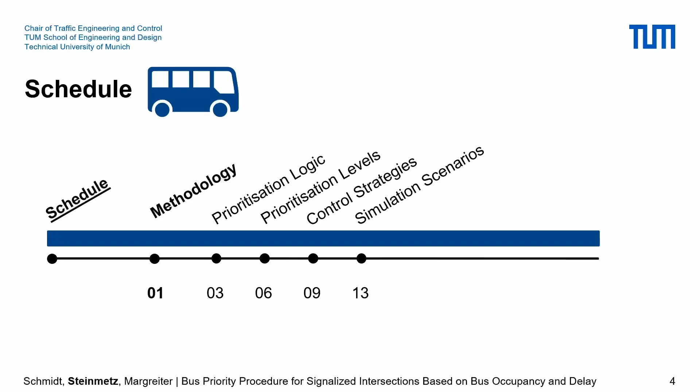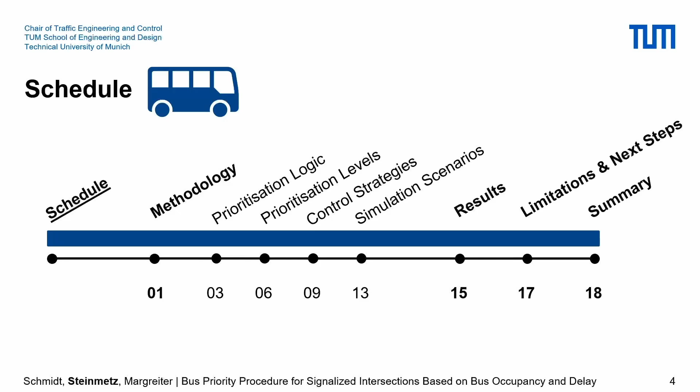So what is the timetable for today? In the next slide I will start with the methodology, including the prioritization logic, levels, the control strategies, the simulation scenarios, and then finally I will show you the results of some test simulations, mentioning the limitations, next steps, and the summary. So what is the methodology in this work?

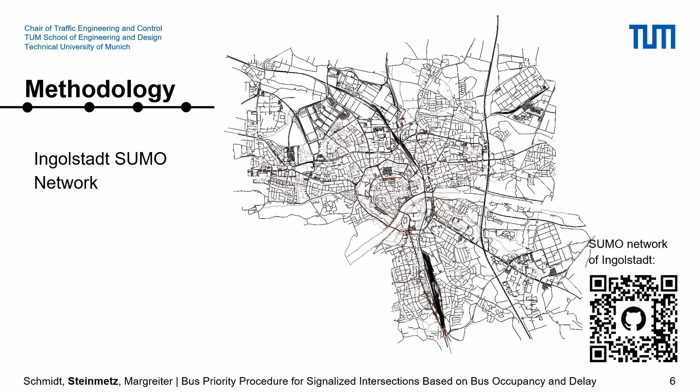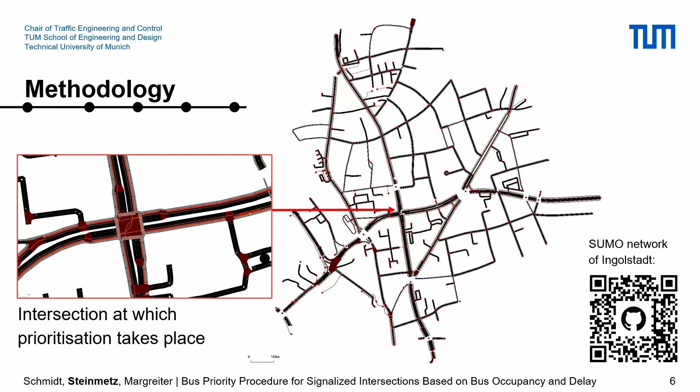We have simulated a subnetwork of the SUMO network of Ingolstadt. This network is publicly available; you can scan the QR code on the right to access this repository. We had the so-called KIWI project running in Ingolstadt for artificial intelligence in the traffic system, and this motivated our work. So we simulated this subnetwork of Ingolstadt and applied the bus prioritization at this single intersection, but we also wanted to show the impacts of surrounding traffic in our test scenarios.

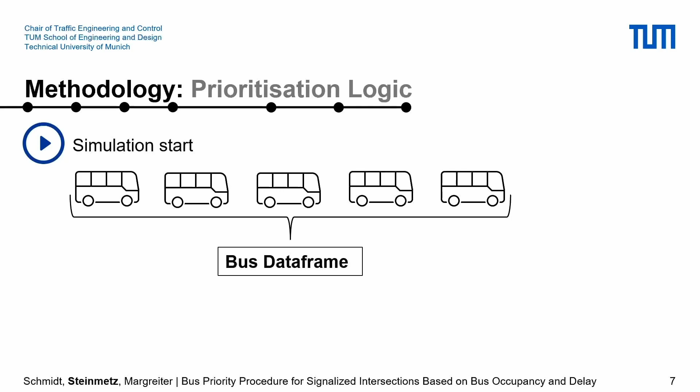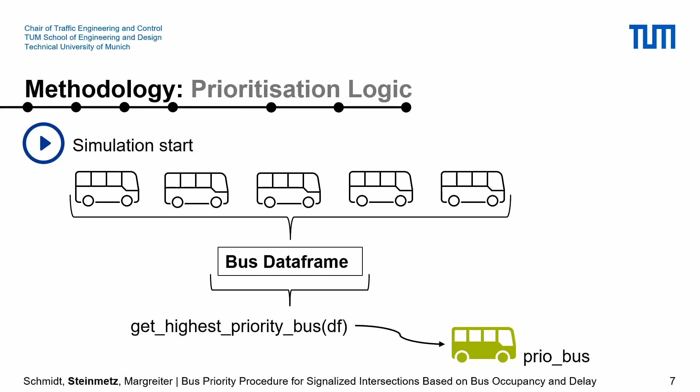So how does it work in detail? During simulation, we always know which buses are in the system, and if we imagine that in reality, with vehicle-to-X communication and roadside units, we will always know everything about our buses. They should transmit their position, their line, their occupancy, and also their delay. For every simulation second, we check again which bus has to be prioritized, and as I mentioned, this can also change.

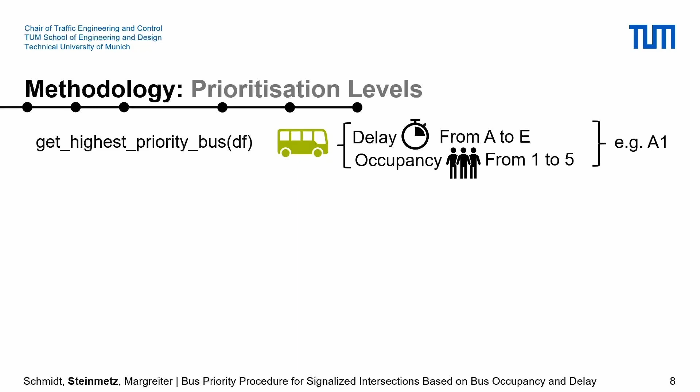So how to decide which bus should get the prioritization? First, we have delay and occupancy considered. The delay is categorized from A to E, with A being the highest prioritization, and the occupancy is leveled from 1 to 5, with 1 being the highest priority. Combined, we receive levels like, for example, A1.

And in the end, we have different priority degrees. Those priority degrees decide at which time the prioritization should start, and also how strong the intervention is in traffic signal control. So when you have level E, in the end we don't make any prioritization.

When we have level D, then green time has to be ensured at the estimated time of arrival of the bus. When we have level C, green time has to be ensured at estimated time of arrival minus 10 seconds, with B minus 20 seconds. And when we have level A, then the prioritization has to be immediately started.

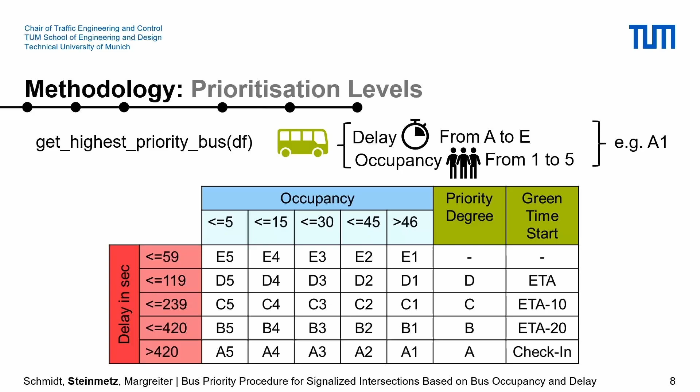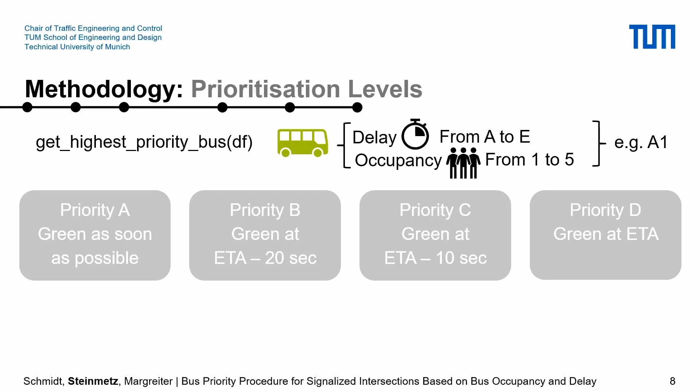So I already mentioned those different levels: green as soon as possible at A, and then based on the ETA value, we have the other priority levels. So here we have the decision of when to start the prioritization, but then in addition, based on what is the current phase that is on and the desired phase, we also have different strategies in the control for how to ensure the green time at the desired time. We have green extension, red truncation, and red truncation extended for that.

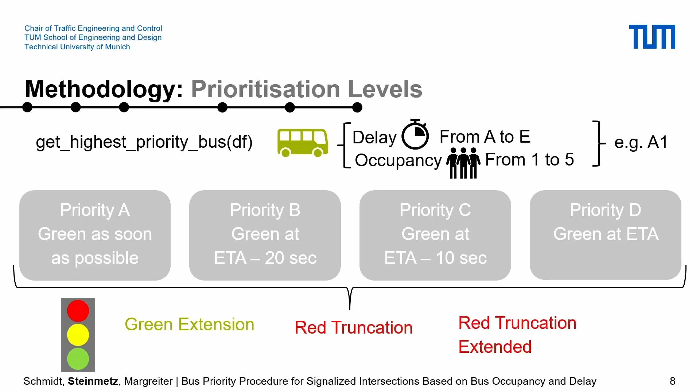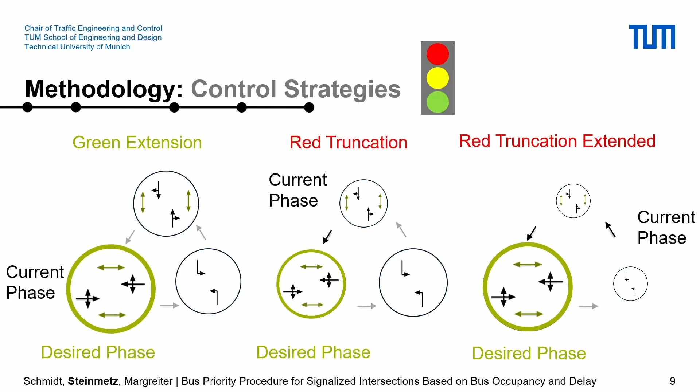So we end our current stage, and also for all the follow-up stages, we only have the minimum green time, so that we arrive at our desired phase in time—not just in time, but in the time that it should be, based on the priority levels that we assign.

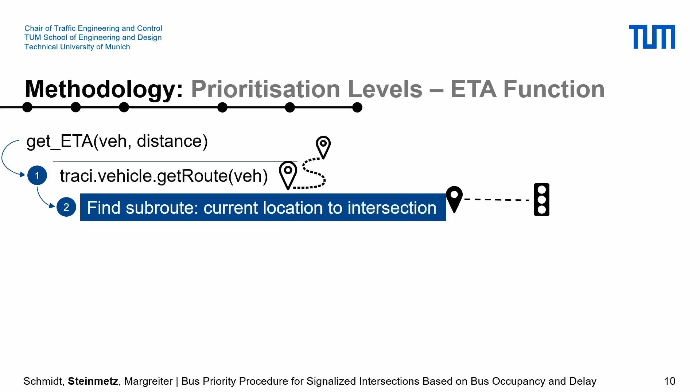So I already mentioned that the estimated time of arrival is a very important parameter, and it has to be a very good prediction to have a good prioritization. So we check for every bus what is the route of the bus, the current location, and distance to intersection. And then it has to be considered if there is a bus stop in between or not, and it's very important to have good speed values for that.

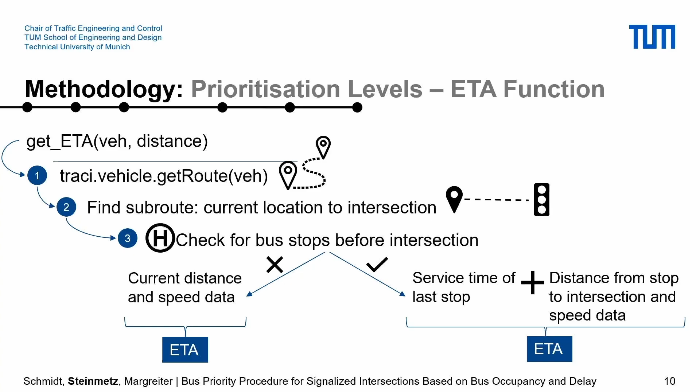So if there is not a bus stop in between, we take the current distance and speed data that we have learned from previous simulations to have a good estimation for the ETA. And if there is a bus stop in between, we also learn from simulation and see what was the service time at the last bus stop, what is the distance to the intersection, and what is normally our average speed at this intersection approach.

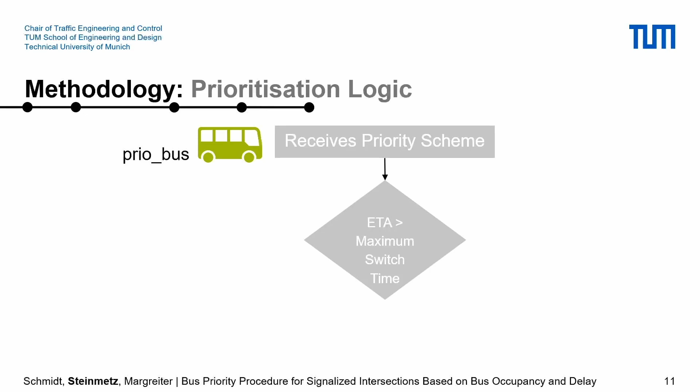When we have decided what is the priority of our bus, the priority degree, and decided what to do to ensure the green time at the desired time, we check again every second if our ETA value is bigger or smaller than the maximum switch time. The maximum switch time is the maximum amount of green time that we need to switch to the desired phase, plus the time that it is supposed to start earlier based on our priority degree.

If the value is higher, we again check our priority scheme and also check if another bus should be prioritized at a higher level. And then, if we have reached the ETA value to act, we start with our priority procedure, and the priority ends as soon as the bus has crossed the intersection.

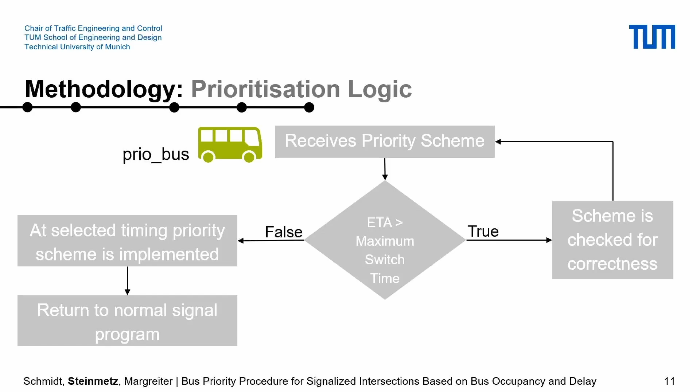There are so many different test scenarios possible to test the control I have shown you. We decided to test 4 different scenarios in 2 different demand levels. On one hand, we have rush hour from 7 to 8 a.m., and then off-peak traffic from 10 to 11 a.m. We also tested the situation where buses arrive at the same time, and then where they arrive at different times.

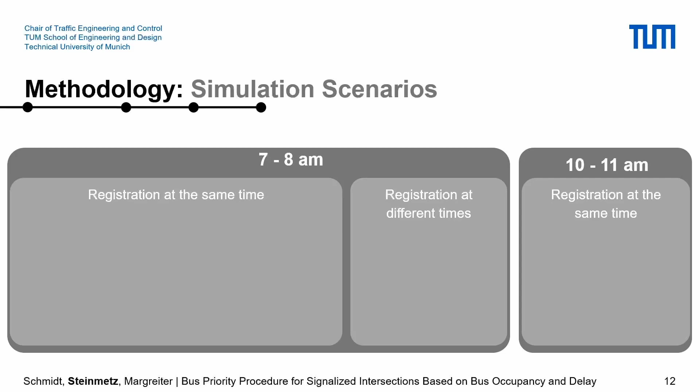We have scenario 1. Here you can see with the arrows the directions of the buses. The buses have the same priority level A, but different occupancy, and the occupancy decides which bus has to be prioritized first.

In scenario 2, we have the same registration time but different priority levels. In scenario 3, we have different registration times and different priority levels. Scenario 4 is actually the same as scenario 2, but in the off-peak hour.

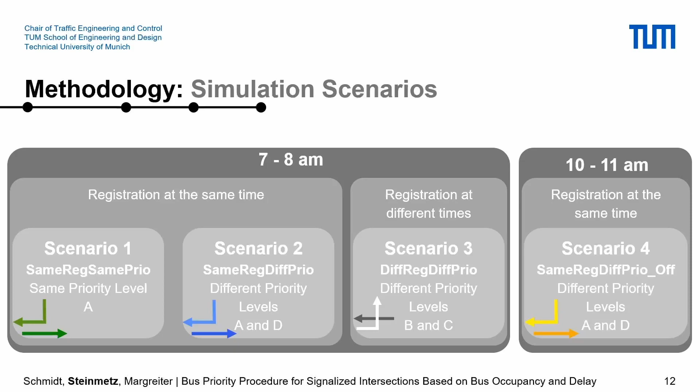Now let's take a look at the results. We simulated every scenario with 13 simulation runs, and we also simulated a non-prioritization scenario, to have a better comparison of how effective the prioritization is.

In green, you can see scenario 1, where one bus is prioritized and the other bus is not. You can recognize that by the P and the N, P for prioritization. This bus cannot be prioritized just because they arrive at the same time. Normally, maybe a bus has a stop in between, and then the second bus can also be prioritized. But this is the situation where the second bus arrives at the intersection at the same time, so only one bus can be prioritized.

We see huge improvements for the prioritized buses. The prioritized buses can save up to 56 seconds, equal to 87%. But on the other hand, when it's not possible to prioritize the other bus, that bus has an increase in travel time, for example here in yellow, 18 seconds. But overall, in absolute terms, the improvement for the prioritized bus is higher than the deterioration for the non-prioritized bus.

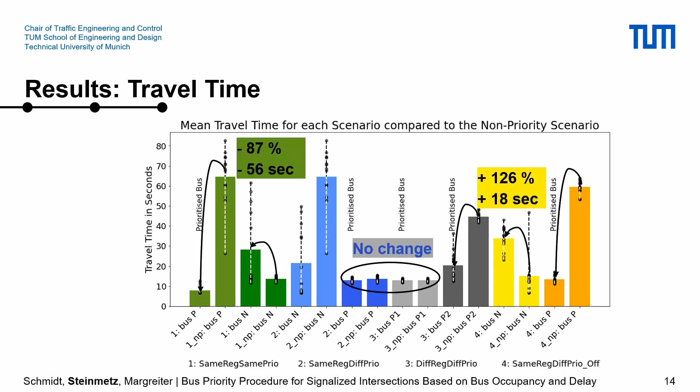Let's go on to the number of stops. Here we observe similar things: huge improvements for the buses that are prioritized. Here we have the average value of our 13 simulation runs, and the number of stops is reduced to 0 for this scenario, for example, and also improved a lot elsewhere. On the other hand, for the non-prioritized buses, compared to a scenario without prioritization at all, we have a deterioration, but overall, in absolute terms, the improvement for the prioritized buses is higher than the deterioration for the non-prioritized buses.

We see similar things to what we did with the travel time. Here for the prioritized bus in scenario 2, there is no improvement because we already have a good situation traffic signal control-wise for the bus. The bus is lucky, so to say. But on the other hand, we also see that here the prioritization does not have any effect. This is because the bus is left-turning here, and it has to wait for the other left-turning vehicles downstream.

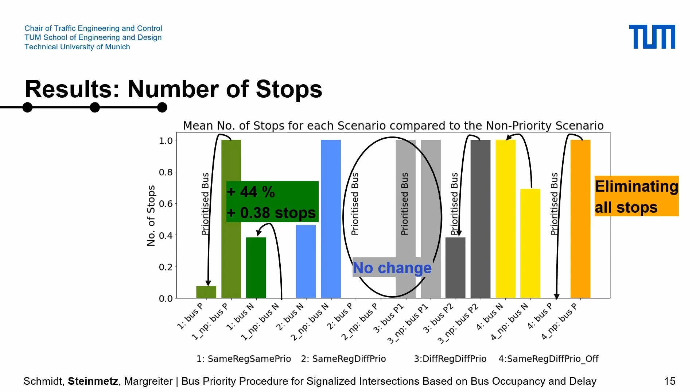Therefore, the prioritization does not have any effect. It would only have an effect if we introduced an additional stage phase for our left-turning buses here.

Let's take a look at the queue length. Here we compare scenario 2 and 4, which is actually the same situation, but once in the peak hour and once in the off-peak hour.

Here is the start of the prioritization, and we can see that our prioritization has an effect. The priority bus is the blue one on the western approach, and the queue lengths go down on the western and eastern approach, while at the same time they go up on the opposing direction, so on the north and southern approach.

What we also see, as expected, is that the queues stay quite small in the off-peak scenario, but in the peak scenario they go up faster. So we have a 120% increase in queue length compared to a non-prioritized scenario in the peak hour, and a 500% increase compared to a non-prioritized scenario in the off-peak hour.

Overall, you can also see how fast we return to normal operation again, and as expected, in the off-peak hour we have a faster return to normal operation. But in general, taking a look at this queue length, we showed that we managed to implement a prioritization that is very effective, but at the same time not too disruptive for the other intersection approaches, ensuring a fast return to normal operation without big disadvantages for other approaches—always an important aim in bus prioritization, to give priority but not too many disadvantages for the other directions.

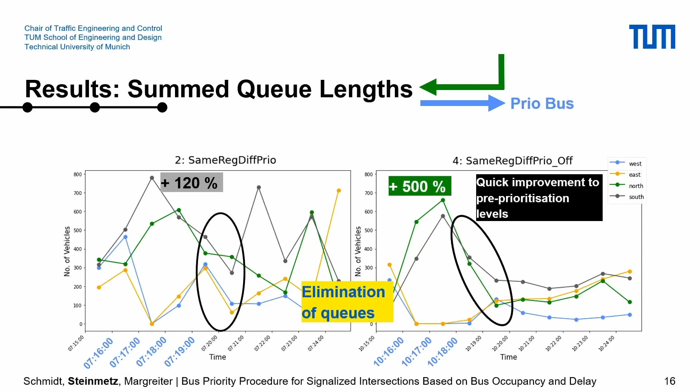Okay, so what would be our next steps? I presented our approach to have an accurate ETA estimation. How could we improve that?

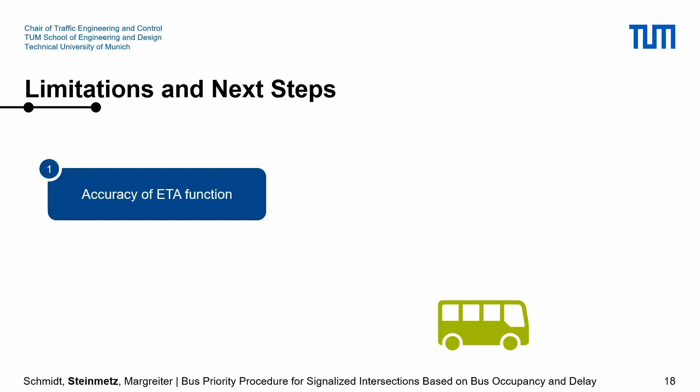The next thing we would like to try is considering real data. Here we learned from previous simulation runs to have a good average speed estimation, and also to know how long the bus will stop at the bus stop. But of course, this could be improved by using real data, so this would be the next step.

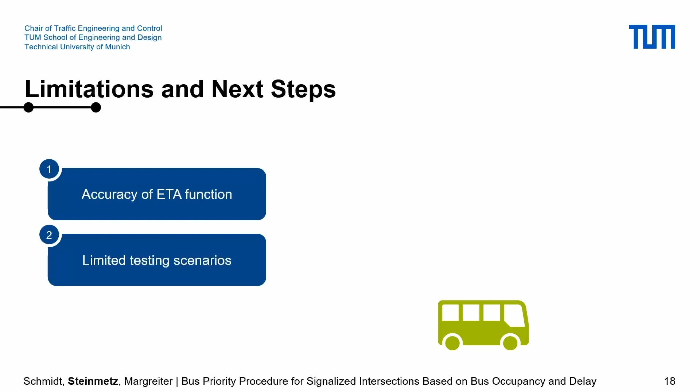Of course, we also tested different scenarios that I haven't shown here. But overall, there are so many scenarios that could be tested to further improve it, especially when we extend the prioritization to the network. What would be our next step?

I have shown a prioritization at isolated intersections, but we expect that if we coordinate the prioritization in the network or along a stretch of intersections, then we can control the platoons of vehicles even more and have bigger improvements of the prioritization than we already have.

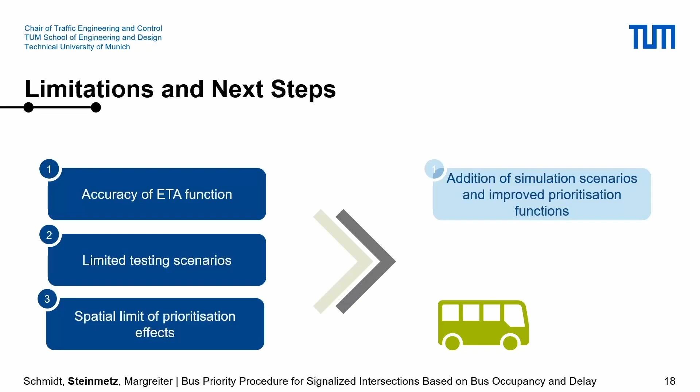So to sum up, the aim was to test and show the feasibility of a prioritization that is not first come, first served based, but adapts always to the situation. So if other priority buses appear that have a higher priority level, the situation is continuously adapted to that. This is possible with V2X communication, which we expect in the near future.

We have shown how this priority degree assignment could work based on occupancy and delay, and what those prioritization degrees could mean for the timing of the prioritization based on the estimated time of arrival. Finally, we showed test scenarios where we observed high reductions in travel time, stops, and queue length for the prioritized buses, while the negative effects on overall traffic were not that high.

So if a situation appears where a bus could not be prioritized, that bus still doesn't receive big disadvantages—only temporary negative effects. If you imagine intersections that are really close to a main station, for example, many buses could arrive at the same time, and in that case you don't want to have such big disadvantages for other buses.